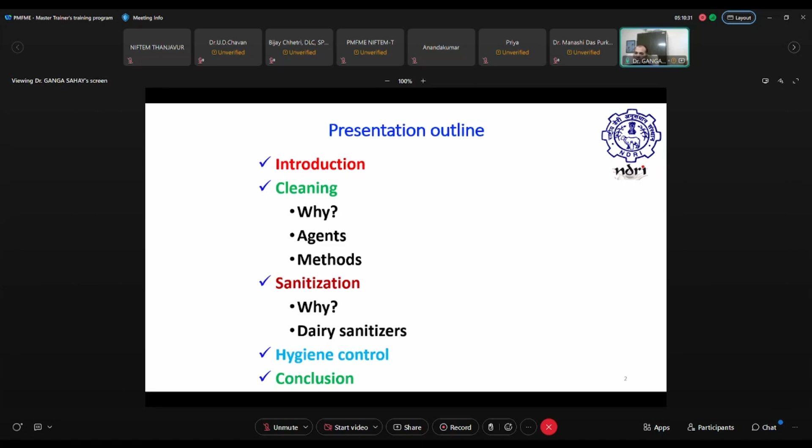Coming towards the introduction, my slides are mostly focusing on dairy, but milk being a very perishable component, we can see that if we can deal with milk, we can deal with other food products easily.

We know that until this is inside the udder of the healthy animal, milk is something which is naturally secreted, and it normally gets contaminated when it comes into contact with the environment, or the milking person or the utensils. So contamination in dairy or food processing starts during production, collection, conveying, processing, and storage from plant personnel, even machinery, or packaging material.

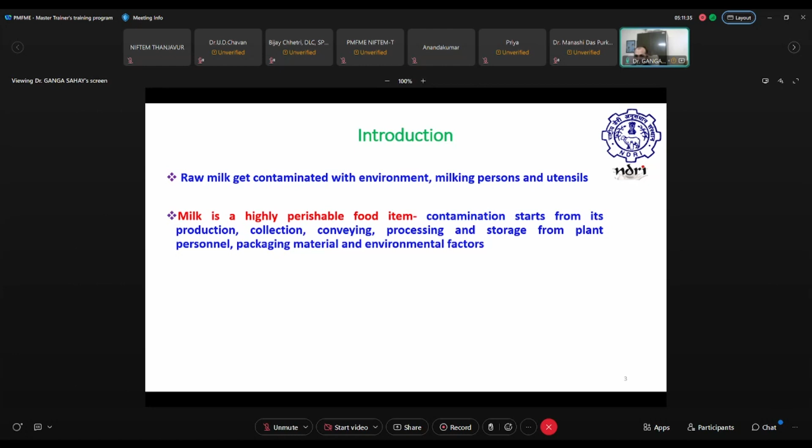Nowadays there is a right of consumers. Earlier, the demand-supply curve was working differently. Demand was high and supply was lesser, so even subgrade materials could be sold out. But now consumers are very much aware, and if they are paying money, providing them with safe food products is their right, and that can only be achieved through the applicability and maintenance of efficient cleaning, sanitation, and hygiene practices.

We can understand this concept with the easy example of the clothes which we wear. We can buy a set of very costly shirt, pay a lot of money for it, but if you are not cleaning it properly, after a few days it will create problems. So it doesn't matter what kind of shirt you are buying or how much money you are paying, cleaning is necessary to wear it again.

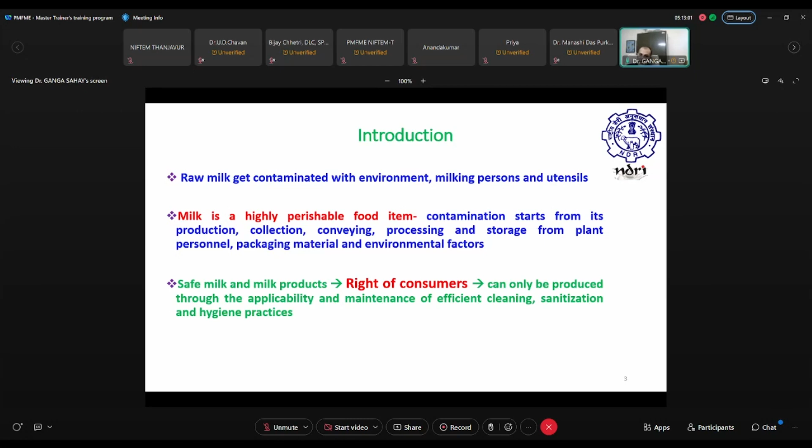The same thing applies in our food processing as well. Cleaning is necessary irrespective of the brand or type of equipment we are using. It may be supplied by a local supplier or an international supplier, but cleaning is an integral part. These are some of the equipment pictures I have. You can imagine that n number of equipments could be there which are used during food processing, and all the equipment needs to be cleaned properly whenever we are using them.

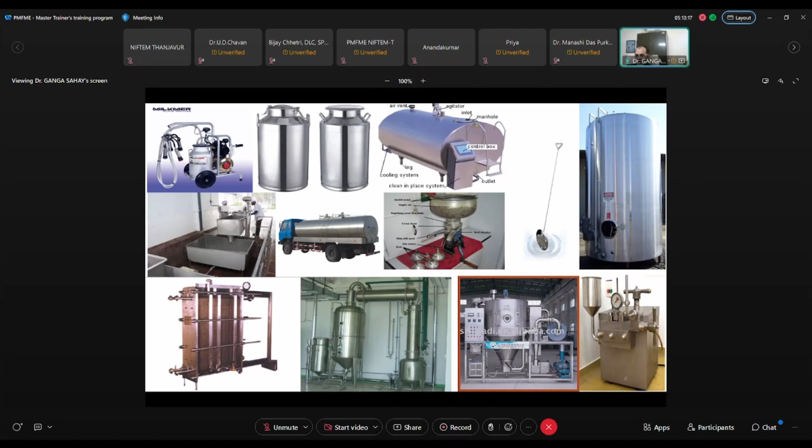So basically coming to cleaning, what is cleaning? Cleaning is the process in which complete removal of food soil is accomplished. What is this food soil? It is the unwanted matter on food contact surface. This is accomplished using appropriate detergent chemicals under recommended conditions from the internal and external surface of the equipment.

Just a second. I did some mistake. Am I audible? Hello? Yes, sir. Yes, sir. You're audible, sir. Just a second.

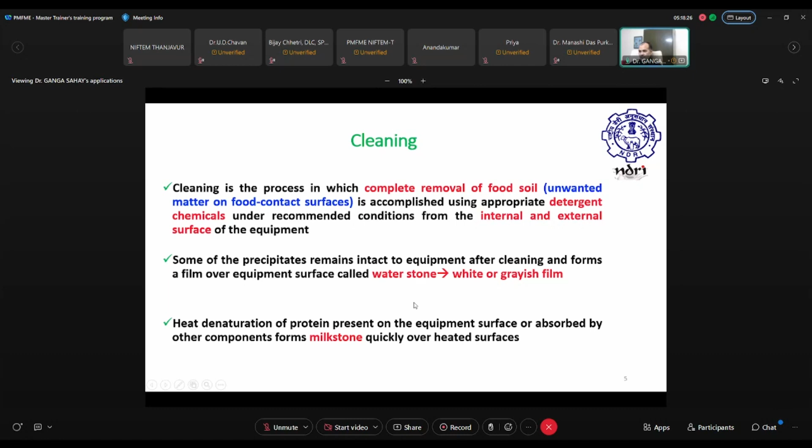This is visible, okay. So some of the precipitates remain intact to the equipment surface after cleaning and form a film over the equipment surface, that is known as water stone, which is normally white or grayish film. And heat denaturation of protein present on the equipment surface, or absorbed by other components forms milk stones, quickly over heated surfaces. Okay, so basically these soils can be divided into two types.

The first one is water soluble, which contains sugar, starch, and salt, easily cleaned by water. And another one is water insoluble, which is further divided into organic and inorganic material soils.

And organic soil consists of food deposits. It could be the deposit of petroleum deposits or non-petroleum deposits, which are like food residues. And in petroleum deposits, we include lubrication oils, grease, and other lubrication products, or maybe animal fat and vegetable fat products.

Okay, so the different sources of this soil: first source is the food product which we are handling and processing. Another source will be minerals from water residues, and then there will be residues from cleaning compounds.

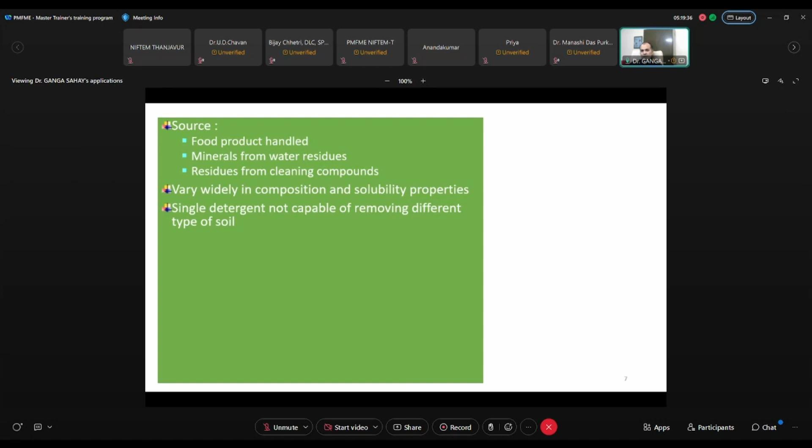Okay, so they vary widely in composition and solubility properties. A single detergent is not capable of removing different types of soils, that's why we use a combination.

This is the example of milk stone, like this is the accumulation of dried milk solids and salts from hot water and cleaning solution. And this is the precipitated or coagulated milk protein and calcium.

Calcium, just a second, let me take an example. Yeah, calcium phosphate. So here you can see what is the composition of this.

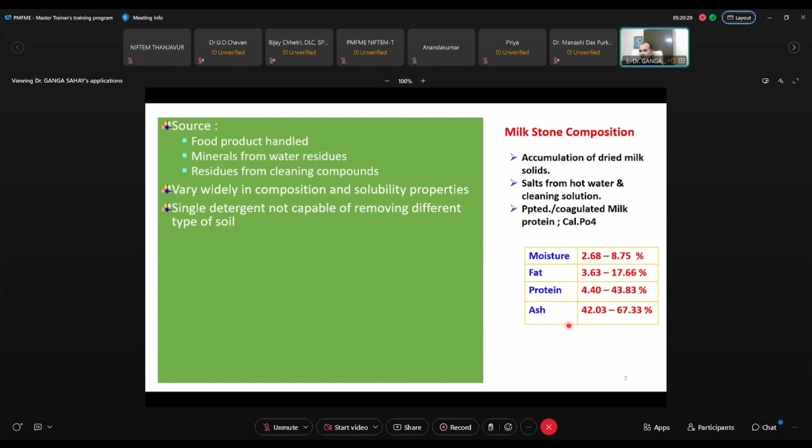If you see here, the moisture content is ranging between 2.68 to 8.75%. It means the TS content of this is beyond 90%, that's why it is known as milk stone. And fat content varies between 3.63 to 17.66%, while protein content varies between 4.4 to 43%. And ash content, you can see here, this is very high, it may range up to 67%. Okay.

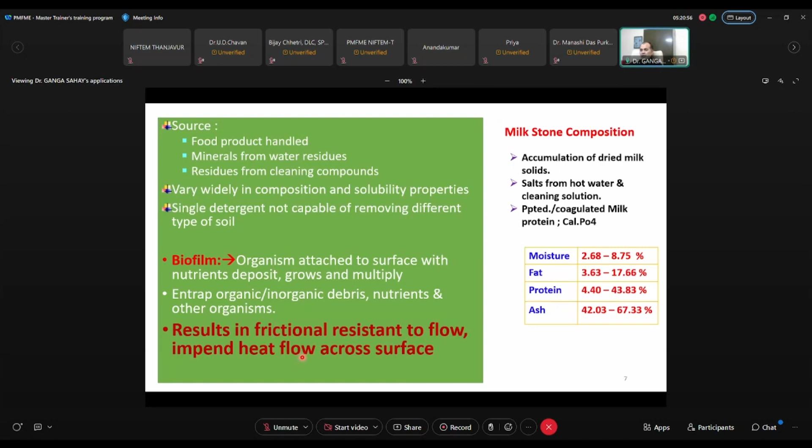So there is another term known as biofilm, which is the organism attached to the surface with nutrient deposits. They grow and multiply, and they entrap organic or inorganic debris, nutrients, and other organisms. And they result in frictional resistance to flow, and they create a problem towards heat flow across the surface. So these are the properties of various food soils.

Like we have different types of deposits: sugar, fat, protein, starch, and monovalent and polyvalent salts. And here you can see their solubility, like sugar is water soluble, fat is alkali soluble, protein is alkali soluble, and likewise how easily they can be removed. So you can see sugar can be removed easily, fat is very difficult.

Protein is very difficult. This is when we are dealing with cleaning without application of heat. But during processing, we are certainly applying heat in certain applications, so heat-induced reactions take place in these ingredients. Like in sugar, caramelization will take place. In fat, polymerization. In protein, denaturation will take place. And interaction with the other constituents will also take place.

So it becomes difficult when we are cleaning the equipment surface post process, and we are not using a single ingredient but multiple ingredients in a food system, so they will also interact with each other, and then their removal becomes challenging.

While cleaning, proper cleaning of dairy equipment reduces the chances of product contamination at each step by reducing the high initial load of microorganisms through removal of their available nutrients. So the basic function is to remove the nutrients available for the microorganisms. If they don't have feed, they won't survive so fast.

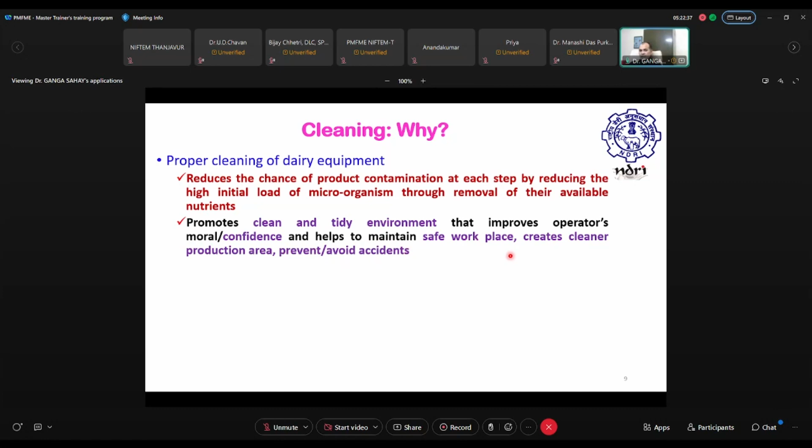It also promotes a clean and tidy environment that improves operators' moral confidence and helps maintain a safe workplace, creates a cleaner production area, and avoids accidents. This also increases the life of equipment by increasing plant efficiency, improves processing economy, and thus profit to the organization. So indirectly, cleaning is a very important thing. Otherwise, a lot of losses, contaminations, result in unnecessary expenses.

Let's understand this with examples. This could be like a pasteurizer heat exchanger surface, through which we send hot water from one side and the working solution from the other side. When the plant is started, over the period of time, scaling formation will take place over the surface of this heat exchanger, and because of that, the heat transfer through this heat exchanger or SS plate will decrease.

So it becomes necessary to clean it after 8 hours or after a shift. Otherwise, what will happen? We can further increase the temperature, but we need to put more energy - we have to send higher degree hot water, at a higher temperature, to get the desired delta T. This will result in increased processing cost.

Similarly, there is another example known as the separator. For defatting, or removal of fat from milk or other substances, we use a centrifugal machine, a centrifugal separator. When we are dealing with this, centrifugal force is working over it, and during this, scale formation will take place - a sludge formation will take place inside the separator. And separation is based on the centrifugal force.

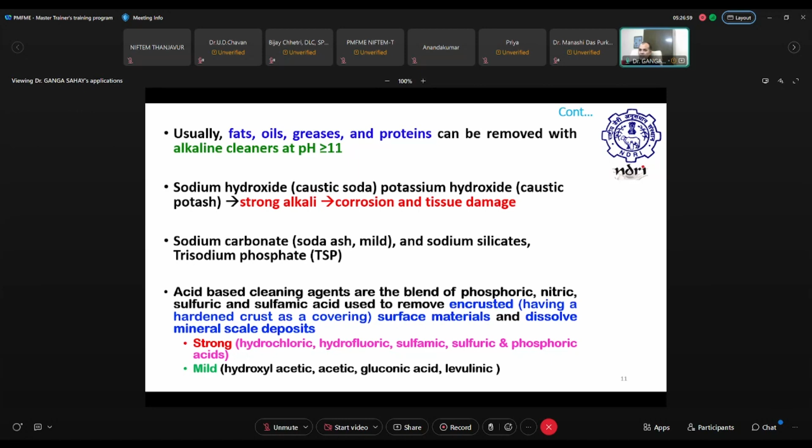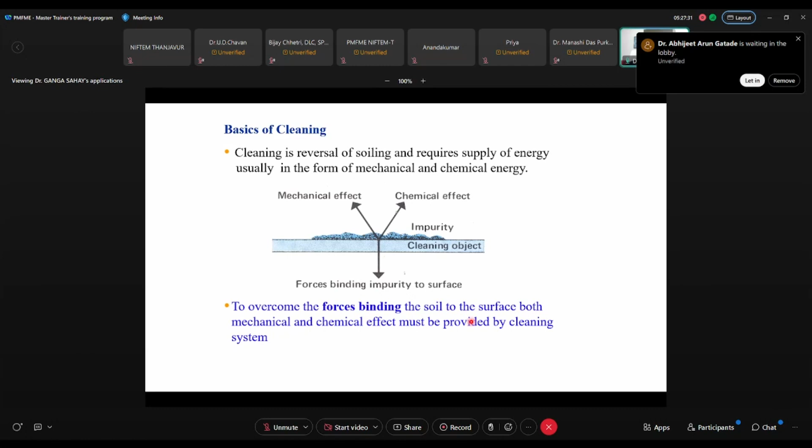Now, if we talk about the basics of cleaning, cleaning is the reverse of soiling and requires supply of energy, usually in the form of mechanical or chemical action. So you can see over here, we are having this cleaning object and impurities are bound with this, and these are the forces which are keeping it bound with the surface. So we have to provide extra, opposite, and higher forces as compared to these forces binding the impurities over the surface, then only this can be removed. To overcome the forces binding the soil to the surface, both mechanical and chemical effect must be provided by the cleaning system.

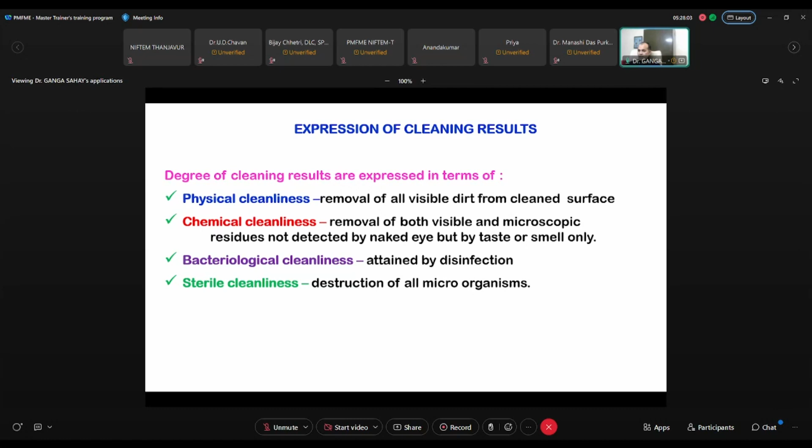Okay. So how do we express cleaning? The degree of cleaning results are expressed in terms of physical cleaning, which is the removal of all the visible dirt from the cleaned surface. And chemical cleaning, removal of both visible and microscopic residues not detected by the naked eye, but by taste or smell only. We cannot see it, but you can feel it through your senses. Then bacteriological cleanliness, attained by disinfection, and sterile cleanliness, which is the destruction of all the microorganisms present on external or internal surfaces of the equipment.

So these are the mechanisms of cleaning. The cleaning mechanism consists of wetting. Wetting means bringing the cleaning solution into intimate contact with the soil to be removed, and for this the solution should have adequate wetting and penetrating properties. The next step is displacement of the residue from the surface of the equipment. The soil will be displaced from the surface by emulsification, saponification, or by mechanical action, and then it should get dispersed into the water, removed from the surface in cleaning solution by dispersion and deflocculation, and finally rinsing to prevent the redeposition of the dispersed soil on the cleaned surface.

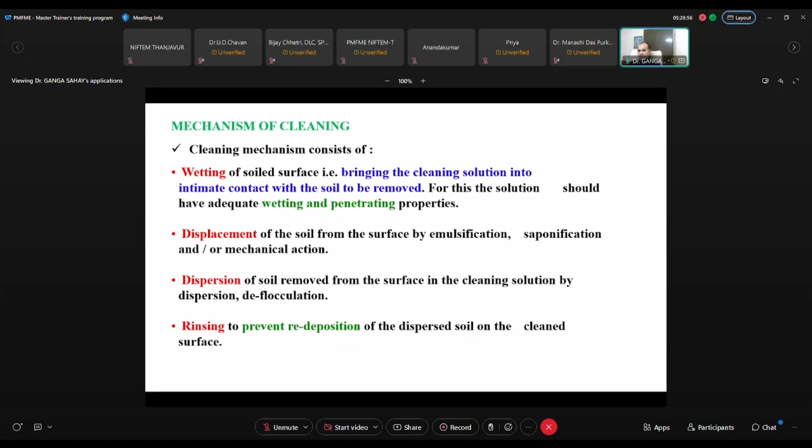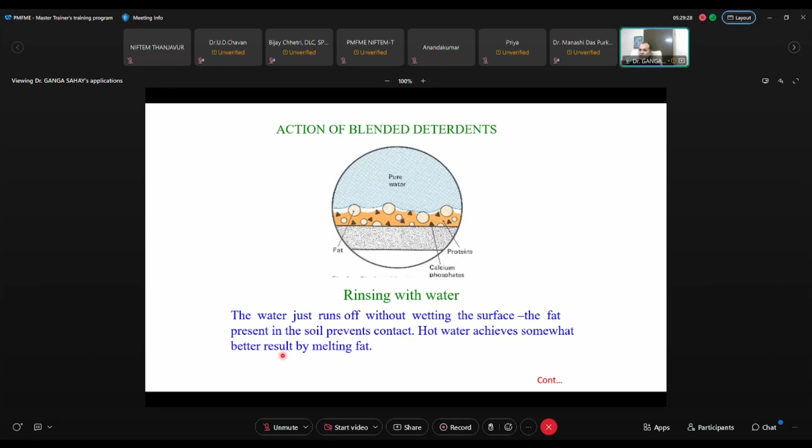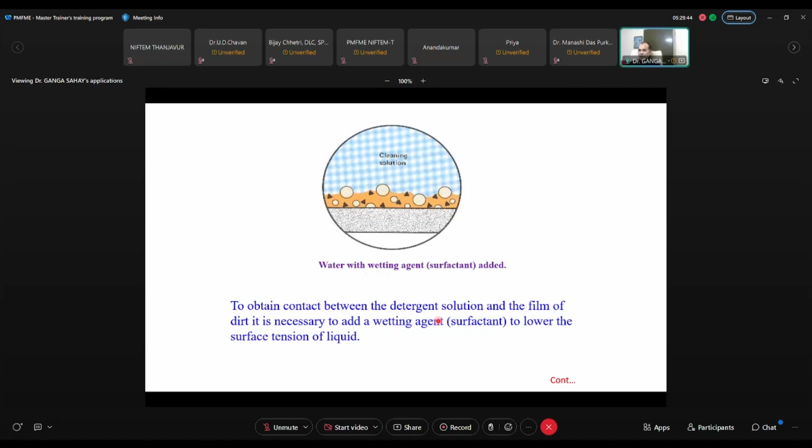Okay. So the action of blended detergent could be different. You can see over here, this is our equipment surface, and fat is bound in this, and there will be some proteins, yellow color, and there will be calcium phosphates. So several constituents could be sticking to this equipment surface. So when we are rinsing with water, what will happen? The water just runs off without wetting the surface. The fat present in the soil prevents contact, and hot water achieves a somewhat better result by melting the fat. So when we are sending some cleaning solution over this surface, to obtain better contact between the detergent solution and the film of dirt, it is necessary to add a wetting agent like a surfactant to lower the surface tension of the liquid. So this will achieve better results.

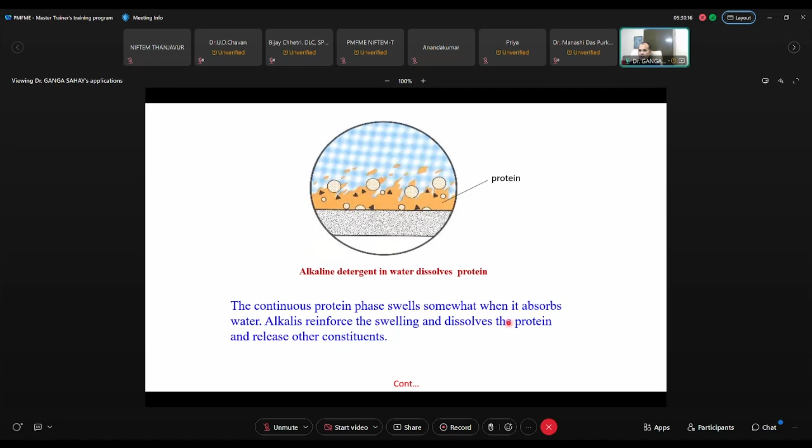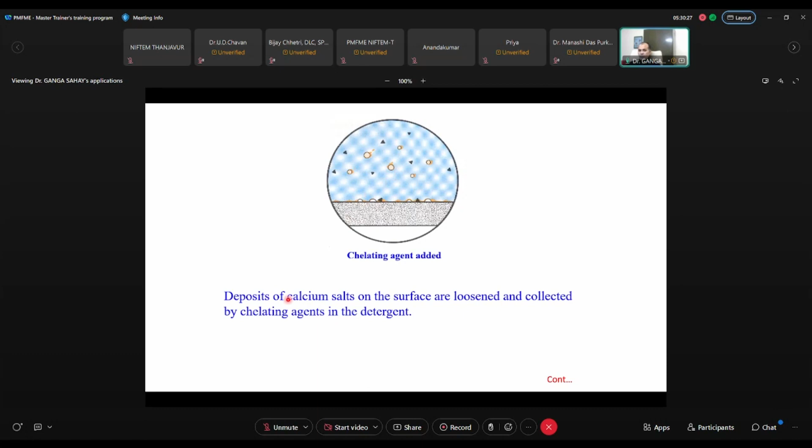And then when we are applying the alkaline detergent, the water dissolves the proteins. So we are having water with the alkali at higher temperatures, and these proteins will be dissolved from the surface into the water. The continuous protein phase absorbs water, alkali reinforces the swelling and dissolves the protein and releases the other constituents. Likewise, we are able to remove the fat, and we can use chelating agents which bind particular constituents. So deposits of calcium salt on the surface are loosened and collected by the chelating agent in the detergent, and the residual film is now easily flushed away by the water. So these are some of the common steps normally used during cleaning.

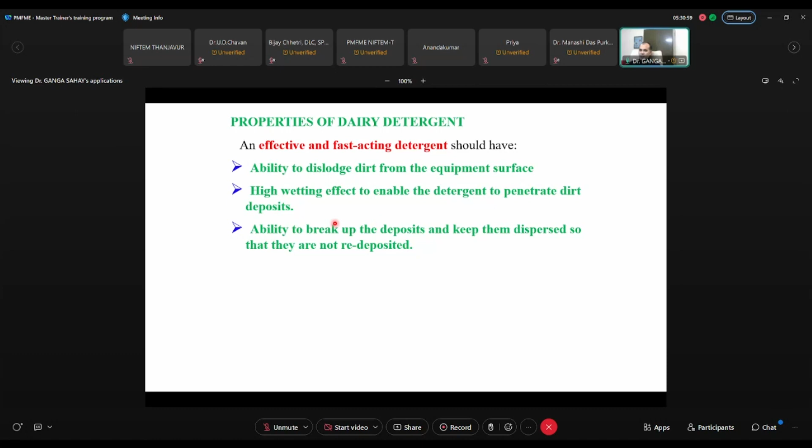Now, properties of dairy detergents. An effective and fast-acting detergent should have the ability to dislodge the dirt from the equipment surface, a high wetting effect to enable the detergent to penetrate the dirt deposit, the ability to break up the deposits and keep them dispersed so they are not redeposited. Then it should have the ability to dissolve calcium salt deposits from the equipment surface, and it must also be able to hold the calcium salts in solution so that no scale deposits are left after cleaning. And moderate to low foam generation capacity, and it should be non-corrosive.

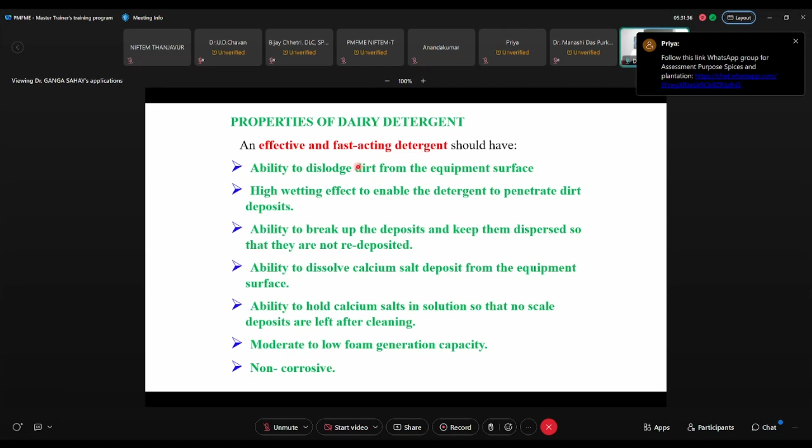So these are examples like enzyme-based detergents. We have a substrate, and these enzymes are very specific to the substrate. So based on the substrate, we have different types of enzyme detergents. For protein and polypeptide, we have protease. For mono-, di- and triglycerides, we have lipase. For amylose and amylopectin, we have amylase. And for cellulose, we have cellulase. These are the reactions happening for the breakdown of these constituents for the purpose of cleaning.

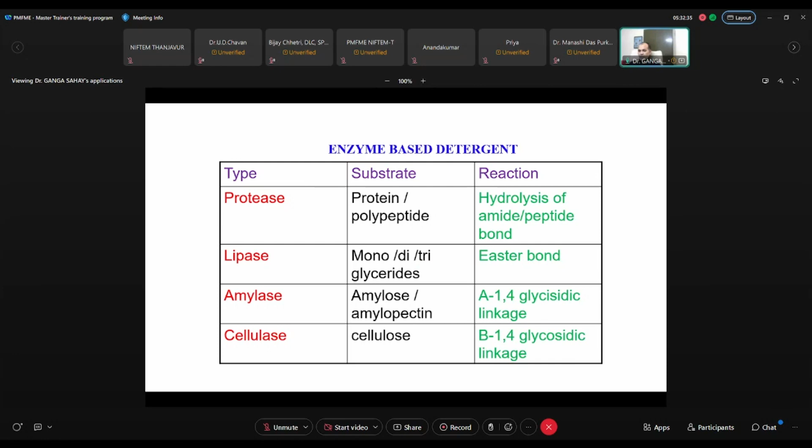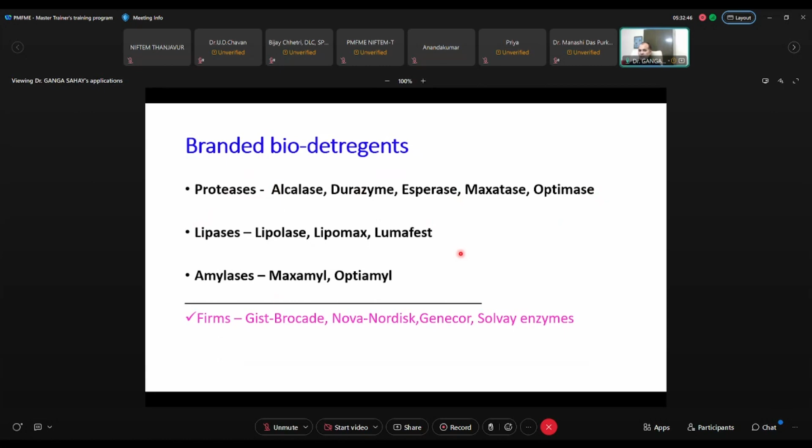Okay. So these are some of the branded detergents like protease. You can find a lot of them. Lipases, these are the suppliers. Amylase. Okay. So we can get these from the market nowadays.

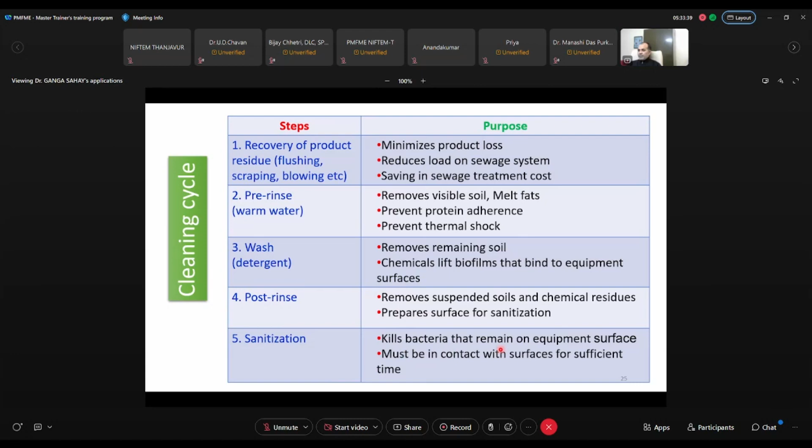Third one is wash with the detergents, which removes remaining soil. Chemicals lift biofilm that binds to the equipment surfaces. Fourth one is the post-rinse, which removes suspended soils and chemical residues and prepares the surface for sanitization. And the last step of the cycle is sanitization, which kills the bacteria that remain on the equipment surface for sufficient time. Okay.

Now if we talk about cleaning methods. The first one is mechanical cleaning, often referred to as clean in place, which requires no disassembly or partial disassembly, the choice of the modern automatic plant. Another one is clean out of place, which can be partially disassembled and cleaned in specialized COP pressure tanks. And the third one requires total disassembly.

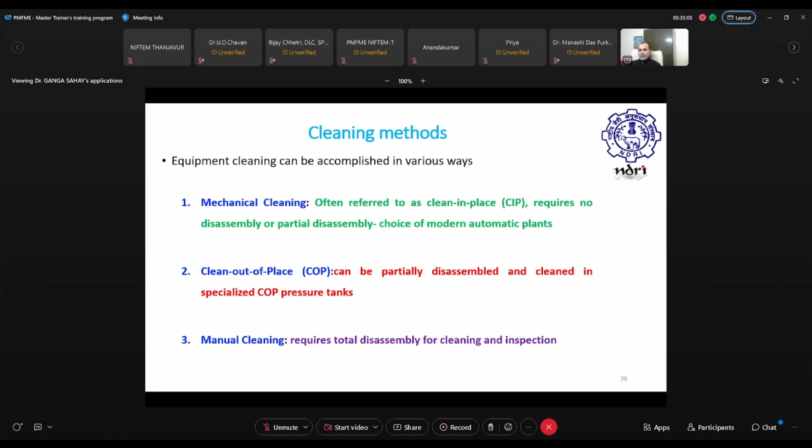Okay. So suppose you have a pasteurizer, how is it cleaned? Suppose it has just completed 8 hours, and we are cleaning it. So what will we do? The first step is rinsing with warm water for about 10 minutes, followed by circulation of alkali detergent at 75 degrees centigrade.

Priya, am I audible? Everything is fine? Hello? Can somebody please tell me? Yes, sir, you're audible. Shall I proceed? Yes, sir, you can proceed.

Okay. So basically, if we see this cleaning in totality, we have three or four important parameters. The first one is the chemical, particularly the strength of the chemical. Suppose you are using alkali solution, it must be added to water in the proper concentration. For a pasteurizer it ranges from 0.5 to 1.5%, so 1% is the average. So the first thing is the type of chemical at a particular desired concentration.

Another thing is the temperature of the cleaning solution. What I mean to say is, suppose you are sending this alkaline water at 20 degrees centigrade, the cleaning won't be efficient. It won't happen at all. So the right temperature, suppose here it's 75 degrees centigrade, you have to maintain 75 degrees centigrade. The third thing is the time, the duration for which this chemical is in intimate contact with the equipment surface.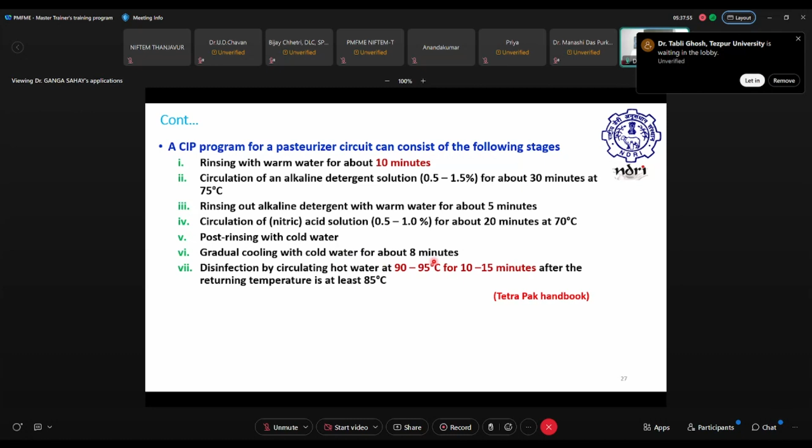So alkali was at higher temperature and longer duration, while acid cleaning is at relatively lower temperature and for a relatively shorter duration. And then post rinsing with cold water and gradual cooling with cold water for about 8 minutes. And then it comes to the last step, the disinfection of the equipment. So disinfection by circulating hot water at 90 to 95 degrees centigrade for 10 to 15 minutes after the returning temperature is at least 85 degrees centigrade.

So here a lot of people make a mistake. They are sending the water at a correct temperature, but listen, when we are sending water from one side, like from our balance tank, it depends on how long the process line is. It must reach each and every component of the processing line, like a tank or everywhere, and then it should return at least at 85 degrees centigrade. Otherwise, it will get cooled in between, and the sanitation won't be achieved properly because the temperature has already decreased. So this is the

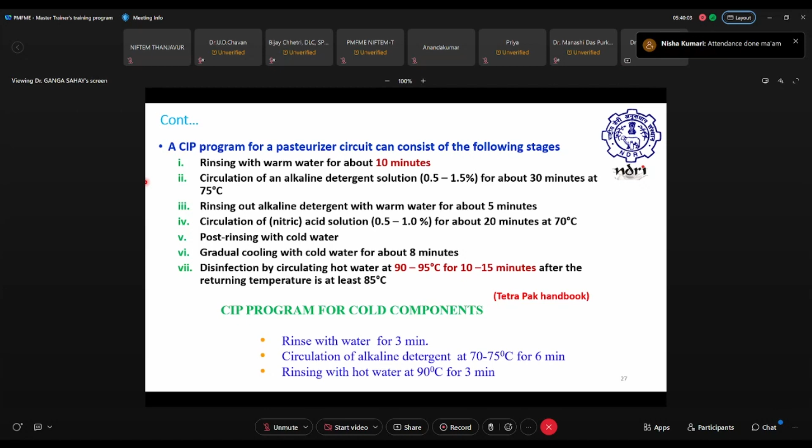Okay. So I was telling about the CIP of cold components where we are not applying heat. We are just storing the substances. There we can rinse with water for 3 minutes, circulate alkali at 70 to 75 degrees for 6 minutes, and then rinse with hot water for 3 minutes. So for this cleaning, we could have a centralized system. We have an alkali tank, an acid tank. We could have different objects, like these different types of equipment. We could have a

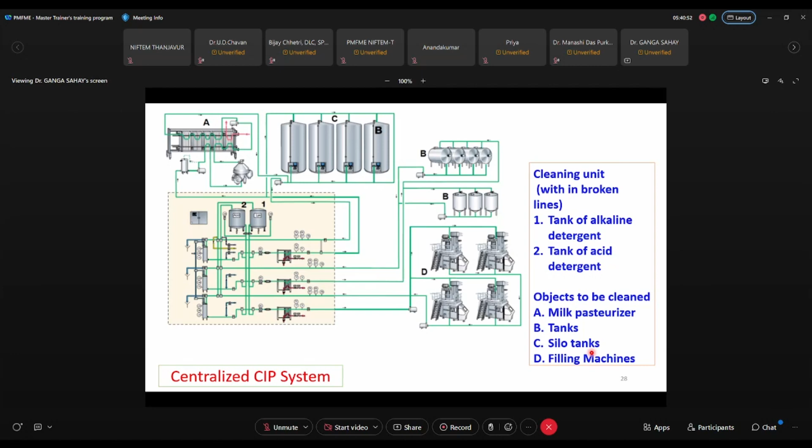Priya, can you hear me? Sir, there is a technical issue from your side. I can hear you, sir, but your screen is not visible. Sir, can you share your screen again? Is it okay? Sir, nothing is visible. No, sir. Can you hear me? Yes, sir, you can reshare your screen. Is it visible to you now? Sir, it's blank actually. Some message says can't share the content. We are having a problem connecting to the sharing service. Try again later.

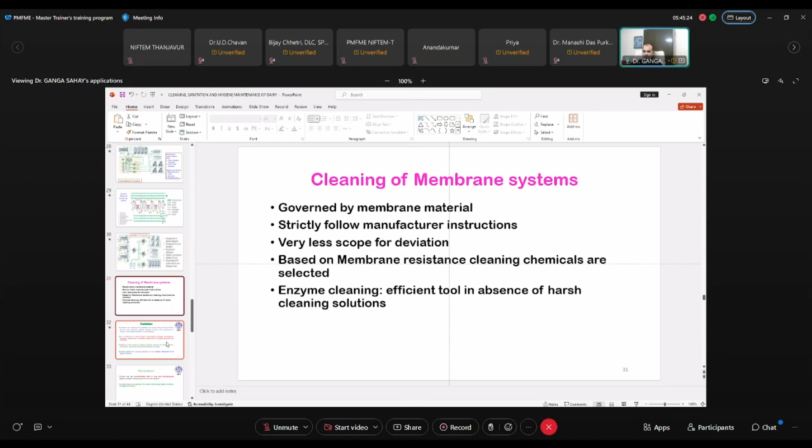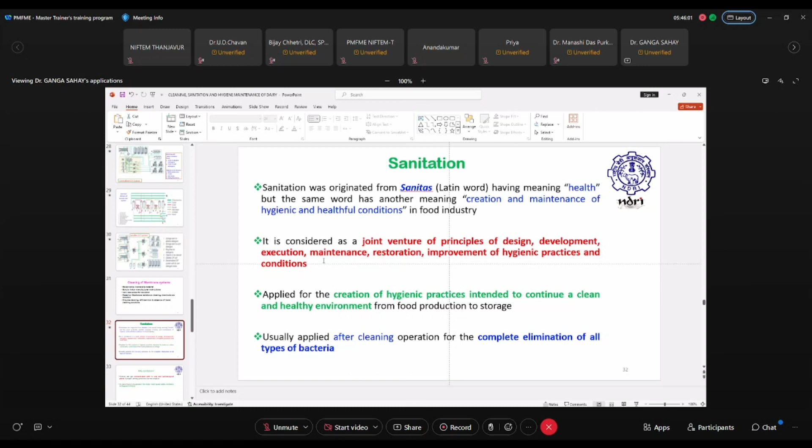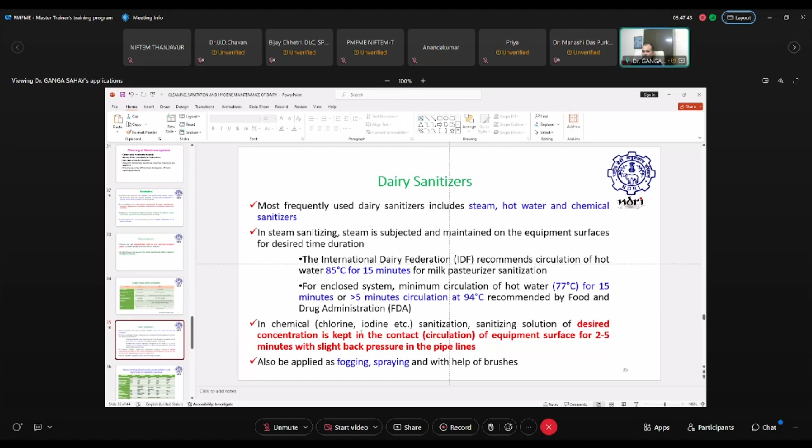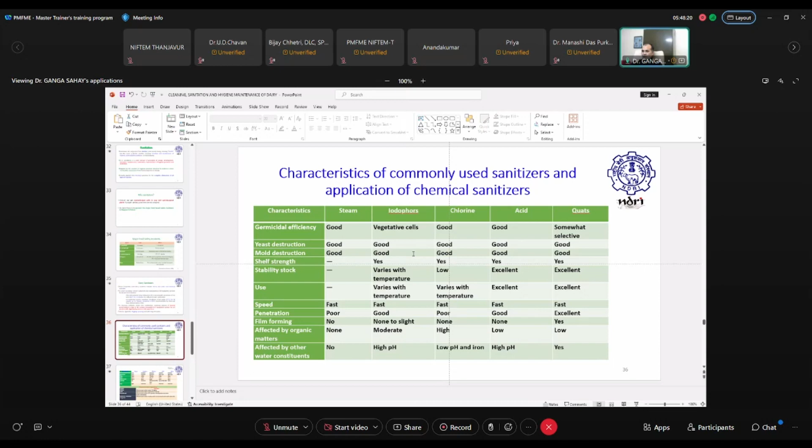So here you can see different characteristics of these sanitizers. These are the sanitizers, and you can see germicidal efficiency, yeast destruction, mold destruction, shelf strength, stability, stock usage, speed, penetration, film forming. So you can compare between all of them. Here also, ease of measurement, ease of use, odor, taste, effect on skin. Acid is moderate, and quaternary ammonium compounds are moderate. So these are the chemical sanitizers.

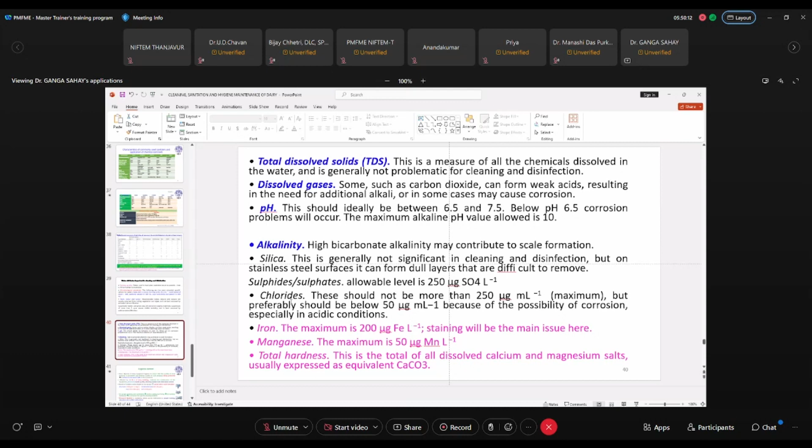Sir, can you read? Yeah. Can you see my slides, please? Yes, sir. Yes, sir. Okay.